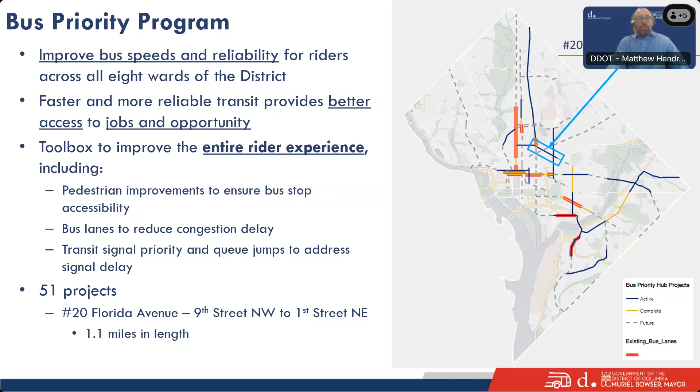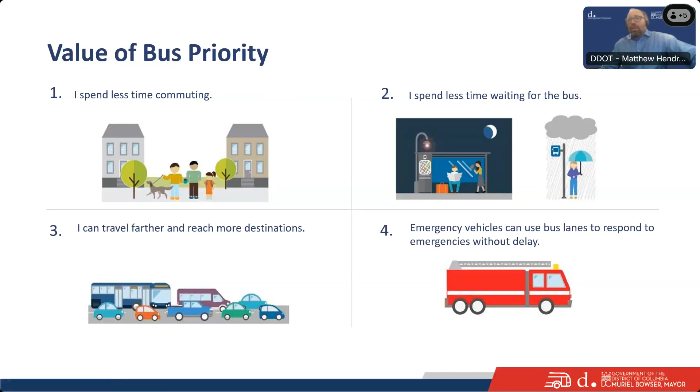Why is that important? There's a lot of great values behind that. Spending less time commuting, less time waiting for the bus, means you get to spend more time with family and friends, walking your dog, hanging out. It means you can get to more places, reach more destinations, including jobs, as well as having the opportunity for emergency vehicles to access that to keep our city safe.

These are the goals we have behind the program: increasing bus speeds and reliability, making things safer especially for people who walk and bike, who may be more vulnerable on the roadway. And then, through busy corridors, streamlining our pickup and drop-off, as well as delivery and access to businesses.

Here you see the corridor lined out through that just over 1 mile for our Florida Avenue Bus Priority Project. There are several other projects happening around this corridor that you should be aware of, and that will be intersecting with this project.

As you look to the top left of your screen, there are 2 DDOT projects between 9th Street Northwest and 18th Street Northwest. One is another bus priority project where we've already presented concepts to the public. We are the same team for this project as well as that one, and we're trying to sync up those 2 projects as we go forward through design.

There's also another U Street streetscape project that will run from 18th to 14th. We're coordinating with our team internally, but those projects are on different timelines, so I just want folks to be aware of that. That will come up in the next couple of slides as we look at all the bus stops through this Florida Ave corridor that will overlap with the U Street bus priority projects.

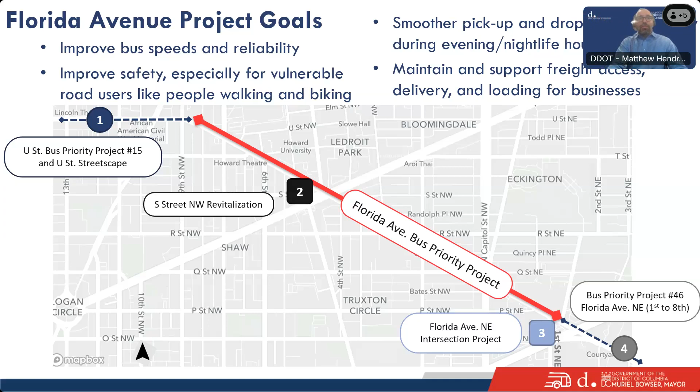Through the Florida Ave bus corridor, we serve 3 bus routes: the 90s, 90, 92, and 96. When all of those overlap in this corridor, we have nearly 15,000 riders per day, the majority of whom are people of color and self-identify as low income, meaning they're in a household that makes less than $30,000 a year. So that is who we're serving, and we're serving a lot of people. This is one of the highest ridership corridors within the district, and we need to make it better.

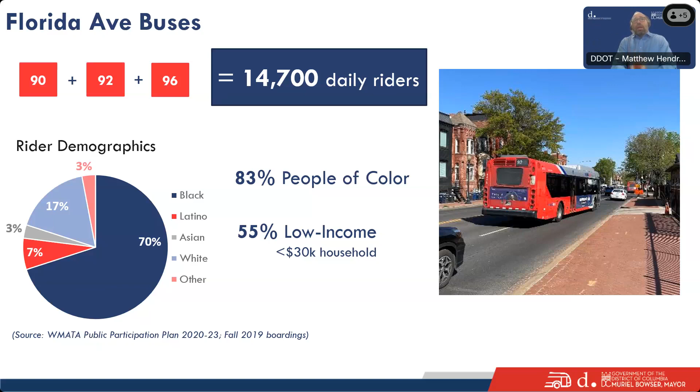Besides transit unreliability, we also have a lot of safety issues to deal with. There are over 743 total crashes in a 5-year period. We had 2 fatal crashes and 199 injuries, where 12 were severe.

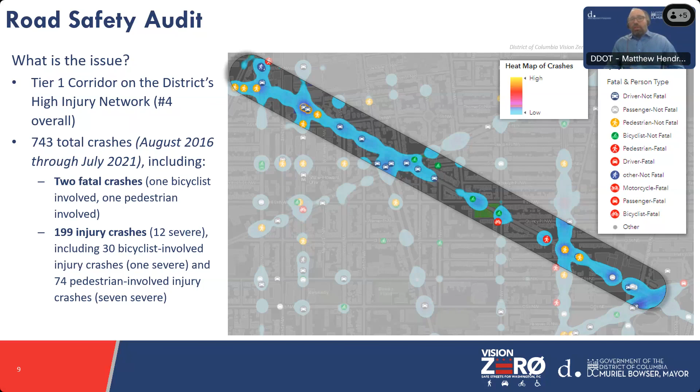I would also say, for those who are most vulnerable, people walking and biking, we've just been on several walks with community members, and for folks crossing the street, it's really a challenge, and we've heard that from you all. That's why this corridor is on the city's high injury network. It's also tier 1, the highest tier, and number 4 overall within the city. So we know that safety is a huge issue and challenge for this corridor.

And speaking of hearing from you, we have walked the streets, knocked on doors, posted flyers at bus stops, and distributed flyers to all residences and businesses. We did 3 community walks for a road safety audit with community members to highlight particular locations and areas of interest and need.

We also had an online map for this road safety audit, facilitated through Federal Highway and our Vision Zero team. We had 116 responses on a comment map that pinpointed particular locations. Then we had our kickoff presentation in May and had several resolutions passed from ANCs and from the council people for this district.

Councilmember Parker, thank you all for your support and desire to see these conditions improved, as well as for having bus lanes and bus priority incorporated into this project. We also had comments through our website, and you guys were emailing us, so thank you again.

And what we heard is kind of what we're seeing out on the streets. Safety is a major concern. We heard a lot, especially for people crossing the street, for people walking. Huge demand for bus lanes — over half of the respondents told us you specifically wanted to see bus lanes on Florida Avenue. We know the challenges of buses being unreliable and delayed, and we want to see more safety for everyone, and speeding and reckless driving was a major issue.

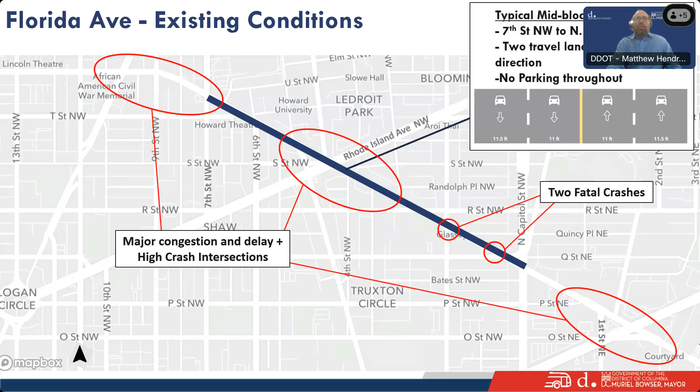So how can we achieve our goals? First, major demand for bus lanes that helps us improve our transit reliability. It's also available for emergency vehicles, but this is dedicated space for buses to move, and that's why you see this red paint across the district.

Curb extensions for easier boarding. It allows our buses, instead of having to pull all the way into the curb, to just stop where the curb comes to them. It makes it easier for them to access that space and not have to worry about people driving up around them or jockeying for position.

And then also merging back into traffic, where a lot of cars just don't allow buses to come back in. So it's a much safer, proven safety improvement, and the bus drivers love it because of that.

Another piece we'll look at today is bus stop rebalancing, or relocation, moving our bus stops to the far side of the intersection so they're not getting caught through multiple light cycles, as well as an improvement of safety there. And not stopping at every single block, which is certainly what we have in a lot of this corridor.

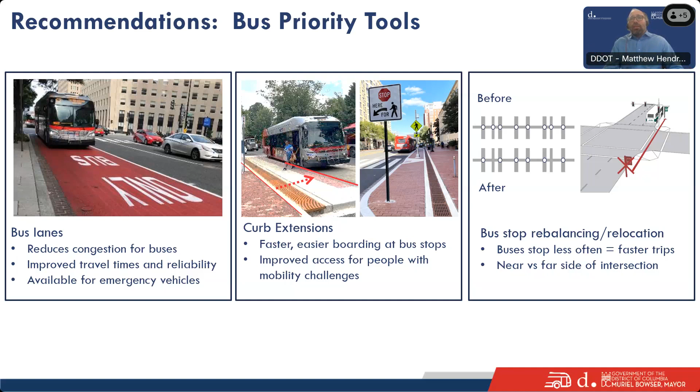Other safety interventions and tools we're looking to use through this project include a median and island kind of pedestrian refuge that helps not only reduce speeds, it creates a space for people to wait and a shorter distance for people to cross as they're crossing intersections.

That's exactly what we'll see with intersection daylighting. We all know when there's a bunch of cars parked really close to the end of the curb at the intersection, and you're walking across or driving, you can't see if someone's coming. Improving that daylighting, as we call it, overall increases the visibility for people walking, so you as a driver can see more as well.

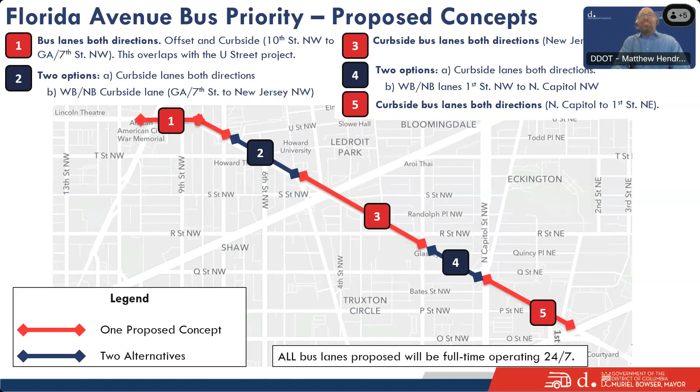We're going to be going through each of these sections, 1 through 5. Some of these sections have more than one slide, so I just want you guys to be able to stick with me as we go through this, and we'll be looking at each of these different concepts on a block by block basis, essentially.

Here is our first concept. Our scope is from 9th Street Northwest to 1st Street Northeast, past New York Avenue. There are projects that are overlapping, and we are in consideration with what is happening with the bus priority project on U Street, so this is an expanded scope to make sure we have balance. As we move from U Street, we've proposed offset bus lanes, which you can see in the block between 9th and 8th on the north side, where you have hatched red lines, maintaining the parking but also having both a bus lane as well as 2 travel lanes. Here we have 2 bus lanes proposed in either direction, which would match up with what we're seeing on U Street.

On that U Street corridor, we're looking for that next bus stop to be at 10th Street Northwest. There are existing bus stops there, but there's also bus stops on 11th as well as on 9th Street. So there's 3 streets in a row, especially going eastbound, that have a bus stop. That really slows our buses down and isn't spaced out according to our standards, where we're looking to have 4 or 5 bus stops per mile. For 4 stops a mile, which is also kind of the DC Circulator standard, that's over 1,300 feet. A lot of the bus stops we're seeing, in particular for the westbound direction, are under 700 feet, which is, if you do the math, 2 times closer than it should be.

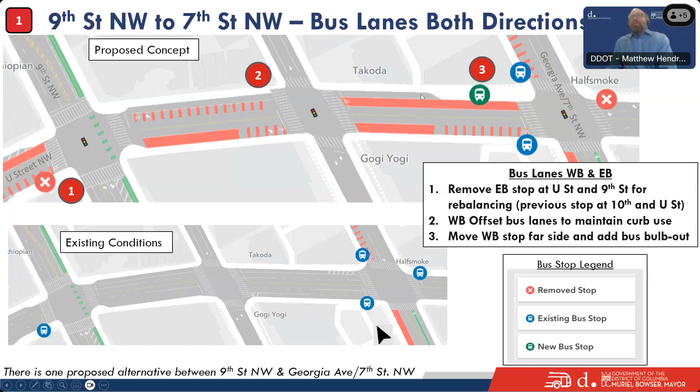I think the key thing here in number one is that we're looking at bus stop balancing. We're also looking at U Street to make sure those stops are aligned. We've coordinated with WMATA, and there's no perfect distance here, but I think what we're proposing makes sense, and I definitely want to hear back from you as far as if we're on the right track. The other big piece is that we have bus lanes running, that's what you see in red. And then another piece, number 3, where we have this new far side stop, we proposed a curb bump out on the far side going westbound for Georgia Avenue. All right, I'm going to keep going.

All right, here we have 2 concepts between 7th and New Jersey. We have 2 options. The first concept has bus lanes running in both directions, and all the numbered areas are consistent in each. The main difference is we have 2 bus lanes in both directions on the first concept, only 1 bus lane going in the westbound or northbound direction on the second concept. So the stop placement is the same, shown with number 1 and number 2.

Here we have a new element from our toolbox, which is the center line hardening, which is not allowing left turns for some of these side streets. You can see that at Bohrer, and at T Street. We're making sure those side streets, as well as Fifth Street, if you're coming out of one of those side streets, you're making a right turn only. Those centerline hardenings are highlighted with these arrows.

Then we have a new proposed eastbound location. A lot of these are highlighting where we have moved our bus stops. The main consistent thing you're seeing is we're either moving an existing stop to the far side, just right across the street, to improve safety and bus operations so our buses aren't getting stuck through multiple light cycles, or we're balancing it out as a whole because we have existing stops. You can see that at the south side at 6th Street. We have one at 7th, and we're just moving that further to before New Jersey.

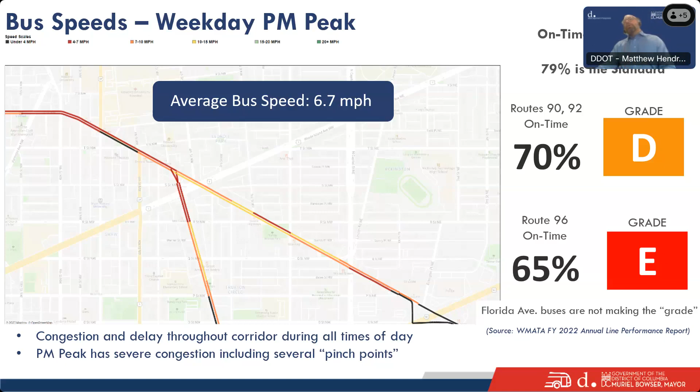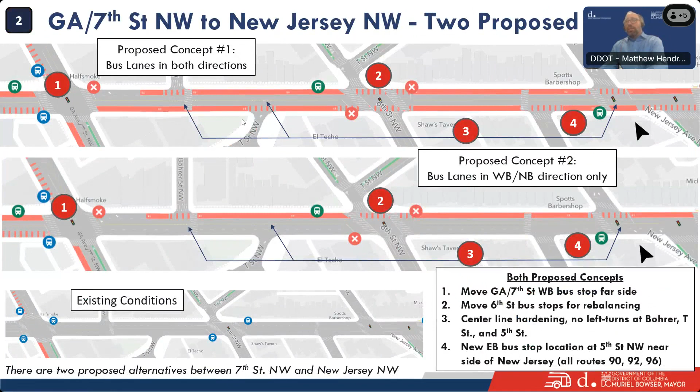Okay, I have not heard anything about this circle around First and R Street. Oh okay, yeah, and that is true. Thank you - this is something we heard from the community as far as First Street people speeding.

Okay, since you mentioned New Jersey Avenue, have you done anything to go back and do a review to see how it's working? And if you implement any changes here, how would you go back to see, to make modifications to make improvements to this area?

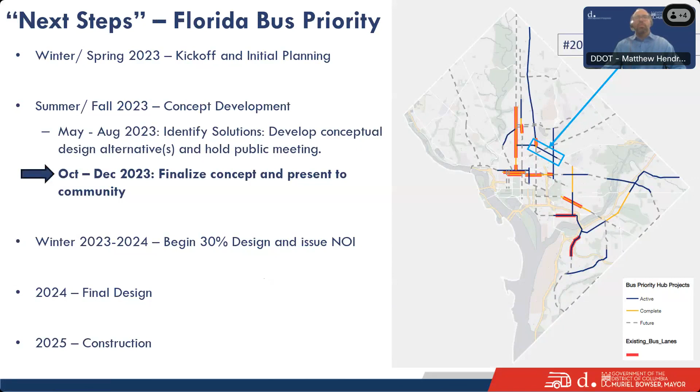I did have a question. I know you were talking a bit about bike infrastructure with the last person, but from First Street Northeast to Q Street Northwest, right past North Capitol, there's more right of way, it's a lot wider. What was the thinking about putting a protected bike lane there versus putting a median? I'm just curious about the safety thinking around there overall.

Great point. As that corridor goes southeast at this angle, sometimes it feels like you're going more north or south than east or west, so apologies for that, but I was trying to be consistent. At the southeast end of this corridor, the future project at Dave Thomas Circle has protected bicycle infrastructure. We looked closely at this, especially around Eckington Place, and the overall safety, particularly having a protected bike lane on the westbound/northbound side transitioning into a bus lane. It really was a compromise between the future of the bike network and the safety interventions we heard about.

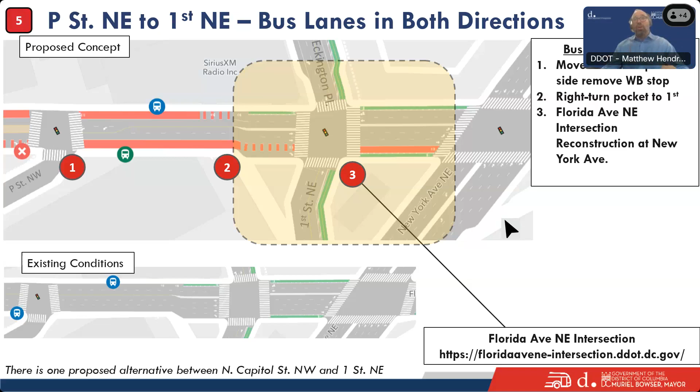We got a lot of comments around both walking and biking. We're trying to have connections for those parallel routes, and this is a section where there could be more flexibility because of the right-of-way space, but we prioritized the walking experience as well as the traffic calming elements provided by that median you see here. Again, there's no perfect solution, and we're balancing different priorities.

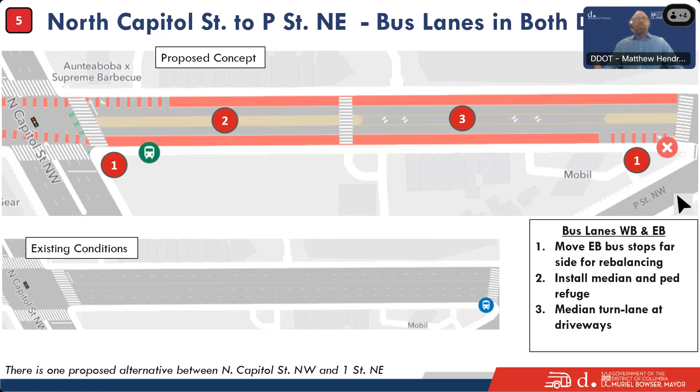For the bike network, we want to prioritize the parallel routes where it would be more comfortable. If we do have a protected bike facility within this area, then where does it go from there? What we were looking at, here at North Capitol, or R Street, Q Street - Q and R were our big connections that we'd be looking to access. We did look at protected bike lanes, but these are the proposals that rose to the top after reviews with our other teams.

Thank you, and before I drop off, if this is the way DDOT is envisioning it, I would really encourage you all to focus on making those transitions between connecting bike lanes and bus lanes - I guess you'd call it a bus-bike lane - as safe as possible.

When I look at some of those points, I can envision a lot of stress for a cyclist making those transitions. Even riding the 14th Street bus bike lanes is stressful enough at times, but it's more comfortable than I think it would be transitioning off Q Street onto Florida Ave, in the middle there, while there are cars also crossing or something like that. I don't know, it's just... yeah.

I'll include more comments, but I appreciate you all trying to find the balance. I'm thinking about those specifically because it might improve the bus, which I think is important, but we also want to make sure it's at least a little bit comfortable for bikers too.

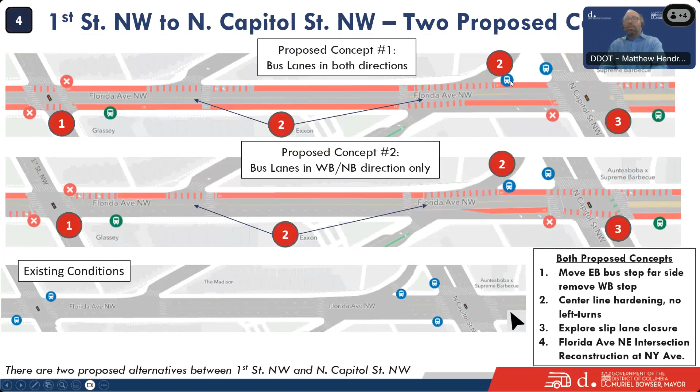Understood. So for the eastbound or southbound direction, we're just moving far side, and we did remove this stop. A lot of that is kind of balancing out the system. We have one stop between R and Second, and then looking at the other slide, we have another bus stop at the far side of North Capitol. So we're asking folks to walk from First up to Second. It's part of balancing the rest of the stops—if we move one stop, then we start to move another, and it's like a domino effect.

How do you really pick the stops that you move? How do you go about picking the stops? One, it's our metric as far as stop distance—what WMATA and our preferences are to have 4 to 5 stops per mile. Right now, within this 1.1 miles on the westbound side, we have 9 stops, so the average bus stop placement is about twice as close as it should be for our standards. We're moving the stop placement to be about 5 stops throughout this mile.

If we expand our scope to U Street and to Second, over that 1.1 mile, we would have 7 stops through that entire corridor, just over 1,050 feet, which is within the sweet spot of our standards. Some stops are a little longer than that, some a little shorter. We look at where the main transfer points are and where we're seeing the most people get on and off as our guiding points for necessary stops, and those end up being where our transfer points are—North Capitol and Georgia and 7th. We work through different stop placements with WMATA and our team to manage those placements.

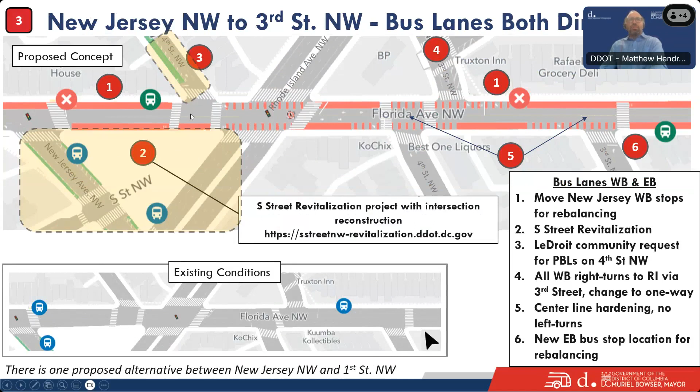I was just thinking that with routes that are more heavily trafficked, you might want even more stops. And that's the balancing part we really struggle with—that's really what we're trying to evaluate.

Jeff, thank you for your patience and getting on the line here. I think that's a great point as far as prioritizing which stops are moved and relocated. Definitely appreciate you sticking with us to get that question in.

We will get to weigh in on this further, right? Yes, these are our final concepts, but you can absolutely continue to comment on this. We're still tweaking this out, and it will go into our 30% design phase. There's still a lot of design work—we're not even starting to design it yet. These are our concepts, and we have all of next year to work a lot of these things out.

I'll be in contact with you. I look forward to hearing from you. Please hit me up anytime, Jeff. I don't know if we should have your email or contact information, but if not, shoot me a message anytime. Yes sir, thank you so much. Bye-bye.

I know someone asked about this traffic circle—we talked about that earlier. This is a potential project, not on the books, but something we heard from the community as far as traffic calming, bike connections, and other safety improvements through this corridor.